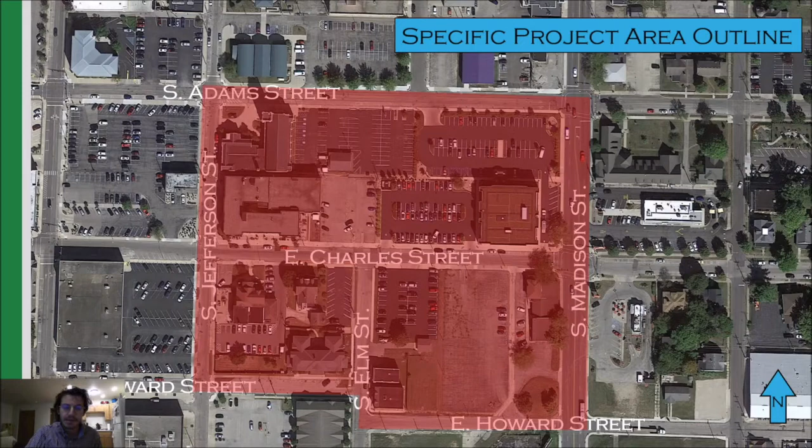Specifically, this is the area we're going to be examining. If you look close, in the area itself you see it's primarily parking lots, definitely land that is underutilized, and definitely land that could significantly increase its green capacity.

Speaking to that, here is the current land use plan that is in place now. You can see that by and large the area is gray with very little red and very little orange, which you can see on the side is coded for different uses.

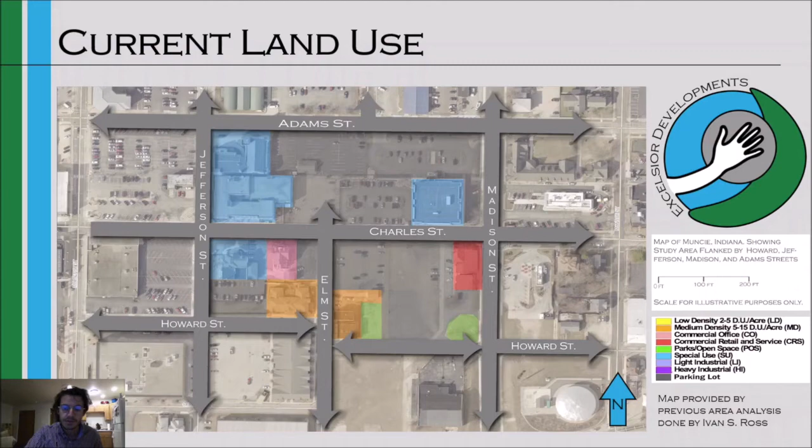Specifically, this project is located in the East Central neighborhood, which is probably most notable because of the historic districts it encapsulates. The project we will be examining is located right adjacent to the Emily Kimbrough Historic District, but the area itself does not have the same historic identity.

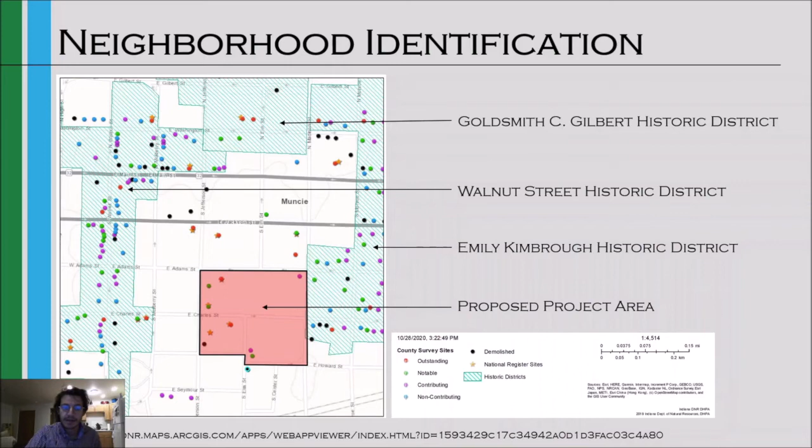So when tackling this project, we want to give it a new identity, and we're going to tackle that through creating a more sustainable community. From that, we will go right into the project renderings.

This is the total project rendering, and we'll break it down piece by piece so it's a little easier to digest. First we'll start off with the lower left-hand corner, as you can see.

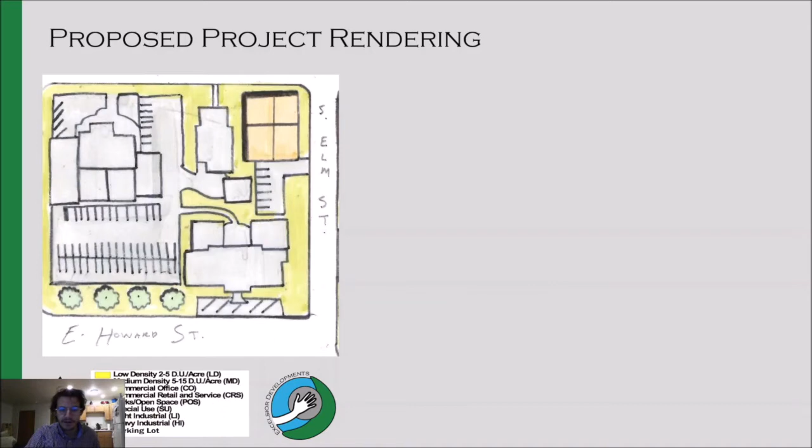This area is already pretty much developed. There's not a lot of space, but even with that, there are things we would propose to change.

The first would be introducing a 2-floor apartment complex, generating 8 new units of 7,200 square feet. We'll also rework parking and make the lot more shared, which will provide more opportunities for green space.

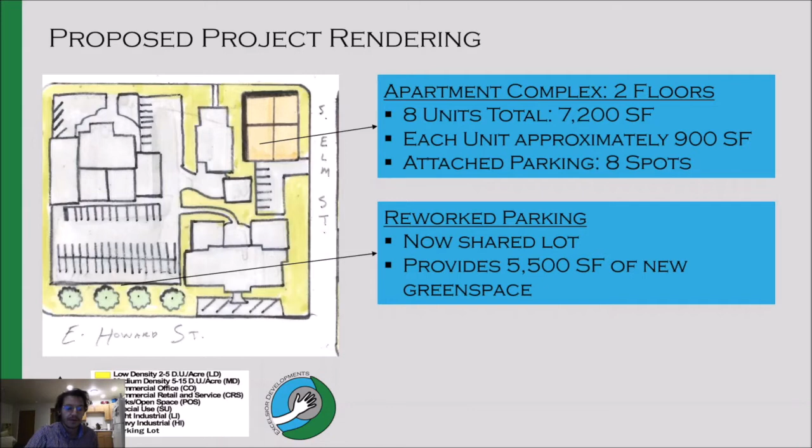From there, we'll talk about the next section, the lower right-hand corner. This project area has a lot of potential. First, we see the opportunity to put in a new apartment complex of 16 units, each around 600 square feet, perfect for a student.

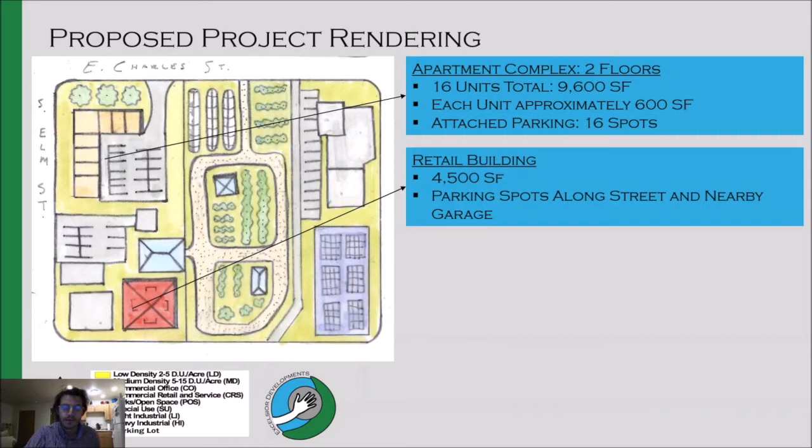We also propose putting in a retail building. This is shown as just one big retail building, but that could be further broken up depending on what the community needs. We see this as a great spot for a grocery store.

Then the next thing, maybe the anchor of our proposal, is a just-under-an-acre urban farm. This farm will incorporate animal husbandry as well as food production, really providing the cornerstone of sustainability and localized food production. It's an exercise of tactical agrarianism that we are really excited about.

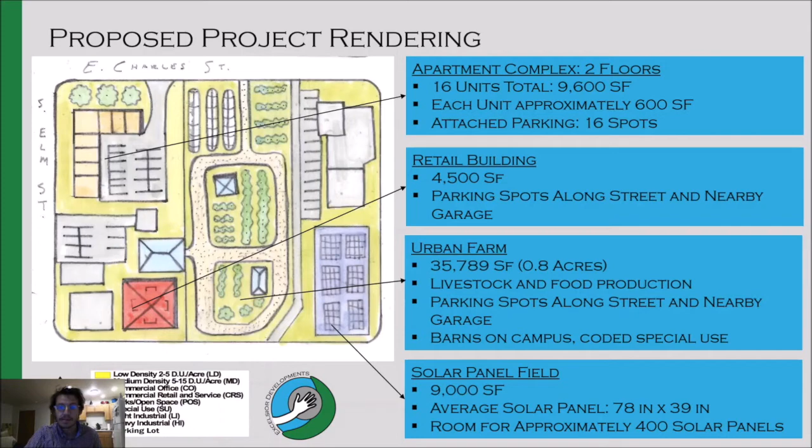We also propose putting in a solar panel field. We estimate you could fit about 400 solar panels within this field, and ideally this would serve as a model that the city can incorporate throughout its entirety.

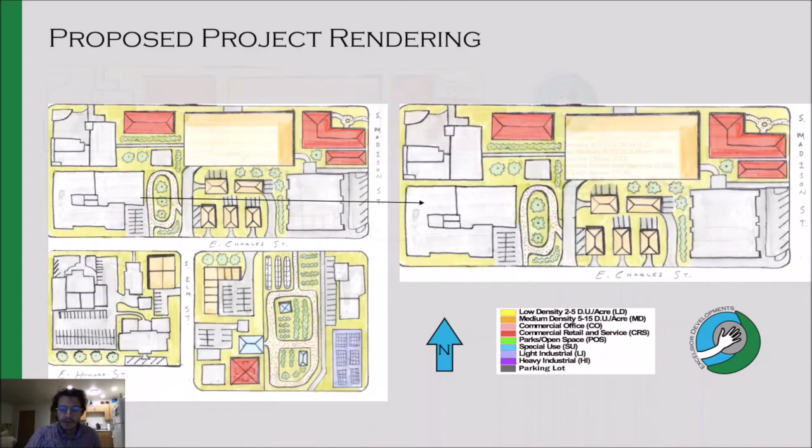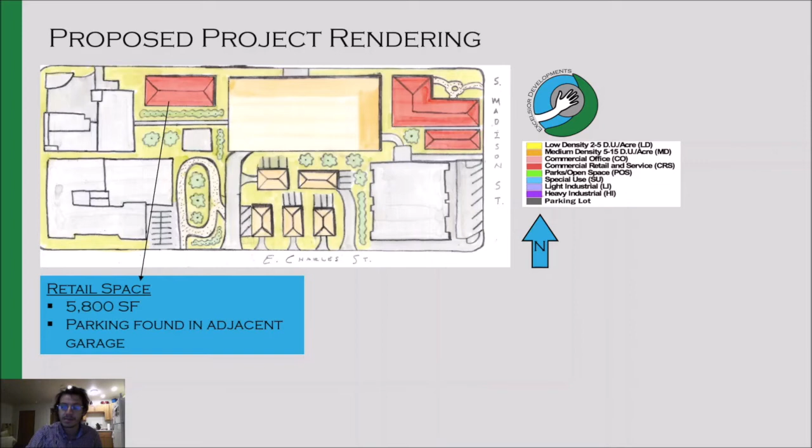Now we'll transition to the last section we'll be talking about today. This project area has a lot of opportunities as well. The first thing we'll speak to is retail space. Once again, this retail space could be one larger business or broken up into smaller businesses or restaurants, whatever the community decides is necessary and wanted.

Then we also propose a park. With the way we are reworking parking, we will have more space for green areas and more space for leisure, a space to actually enjoy instead of just staring at concrete all day.

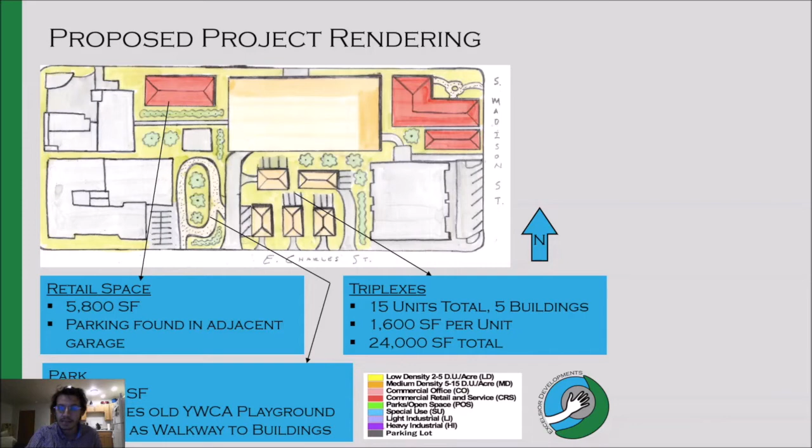Next, we propose putting in triplexes. These would be 15 units in total of about 1,600 square feet, so it would be a great place to raise a family and provide some of the missing middle housing that is currently not present in the area.

Finally, next we'll put in a shared parking garage. This will be around 31,000 square feet, so it's quite substantial, but it will generate 516 new parking spots, which will generate a lot of revenue that we'll see later. We also propose 2 more retail buildings.

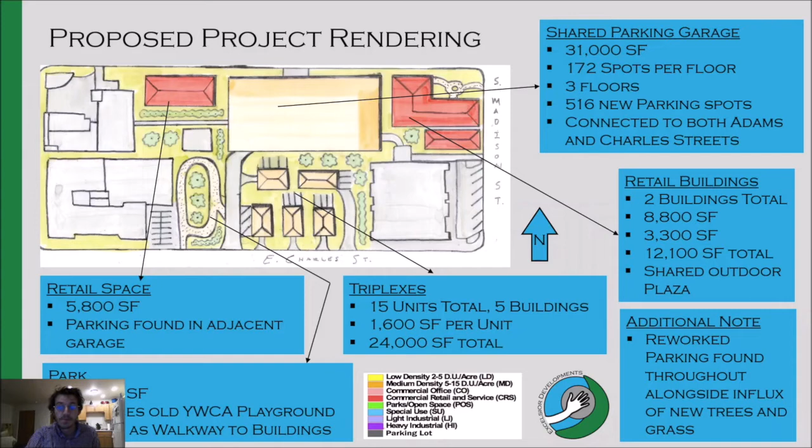Now these are coded retail, but if office space is more needed in the area, it could definitely change. It's important, we found, to incorporate a shared outdoor plaza, as features like that become more of a necessity in a COVID entrenched world. Also, the reworking of parking has allowed us to put in more trees and more grass, things that have been previously absent in the area.

Concluding, here are some closing remarks from us here at Excelsior Developments. We see this area as having huge potential for underutilized land, and through utilizing it more efficiently, you can give the area identity, creating a more diverse community while giving new places to live, work, play, and congregate, ultimately all in the same area, which is sustainable.

This also provides massive opportunities for revenue generation where there wasn't any before. This is also an effort that can help piece Muncie together. If you think of the city as a mosaic, this is a tile that other areas can build upon, ultimately creating a more beautiful and sustainable city.

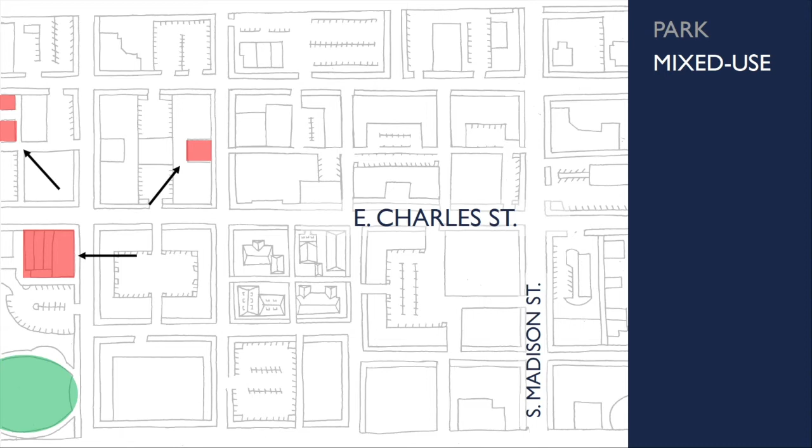First, we'll mention the park that's nearby, a great recreation opportunity with a lot of public programming that happens there. Mixed-use retail activity, notably the cluster on the left side of the screen on Charles Street, has a neighborhood bar there that's really popular. Also notable is the vacated alley that serves as a community space.

We have offices surrounding the site. Most of these are not historic structures; the one that is historic we will note, and that is the Riley Jones house on Charles Street. There's a YMCA, a YWCA providing important program and support for women, and transitional housing operated by the county. Open Door is a facility that provides affordable dental and medical services. We do have some affordable housing with the Howard Square development.

Several churches on the site, the public library, and municipal use there in the bottom corner with the water treatment facility. And across Madison, we have several fast food locations. It's important to look at the existing land use because we want to integrate our development into this site and keep it within the existing context, but also add some additional vibrancy.

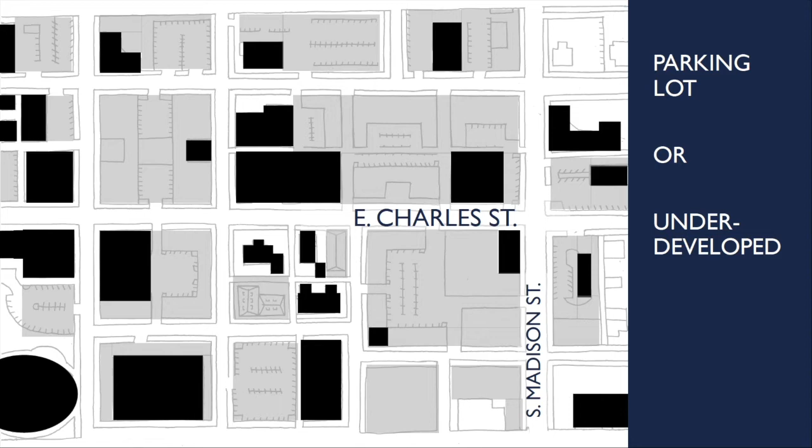So I took those buildings and blacked them out to demonstrate that this is all the parking that's on the site. It's about 75% of the land area, either a parking lot or some sort of vacant or underdeveloped lot. This is our focus area: 5 blocks, or 14 acres.

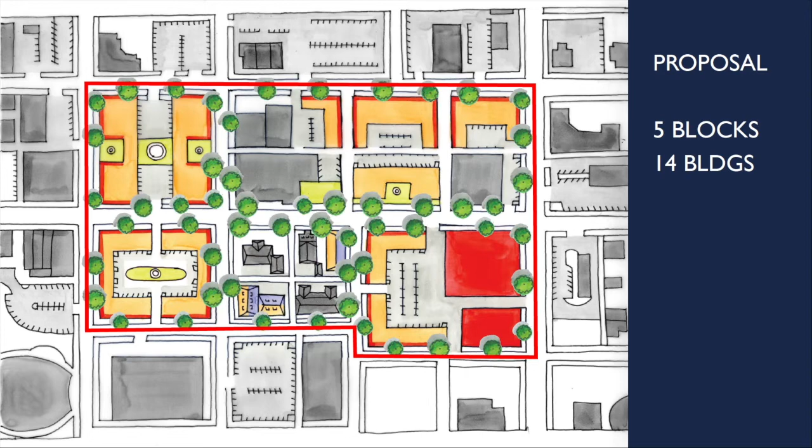So now we'll look at our proposal for the redevelopment of this site with infill development, again talking about use. This is what we're here to do: 5 blocks, 14 buildings. You'll see that we have a really wonderful illustrator on staff. We actually have to take down 4 buildings in order to make this development happen as proposed.

We intend to bring housing to the site. We want to respect the existing social services. We want to attract a grocery and a pharmacy, opportunities for retail and restaurant. We want to improve the connectivity, and we want to provide some on-site energy sources.

So looking at each one of these blocks individually now—there's 5 of them in total—a lot of mixed use proposals. We're keeping most of our development at 3 stories. We feel like that's a very good pedestrian scale height and that it's conducive to the existing character of downtown Muncie.

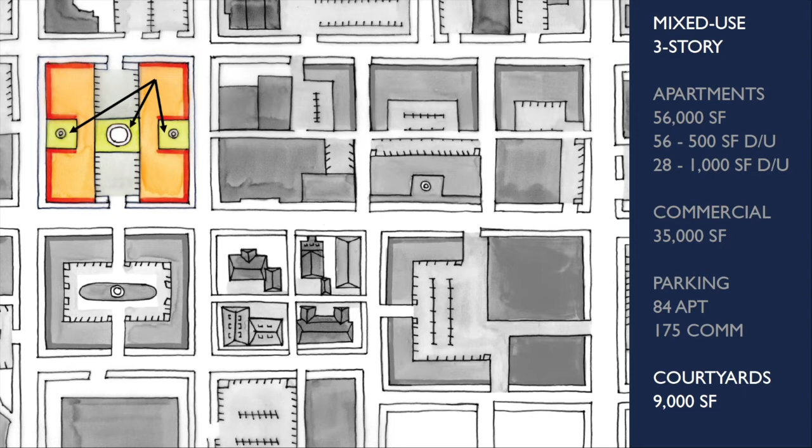Also, part of what makes our organization unique is how we like to add something kind of magical to a place, and we're doing that in this development through the use of courtyards.

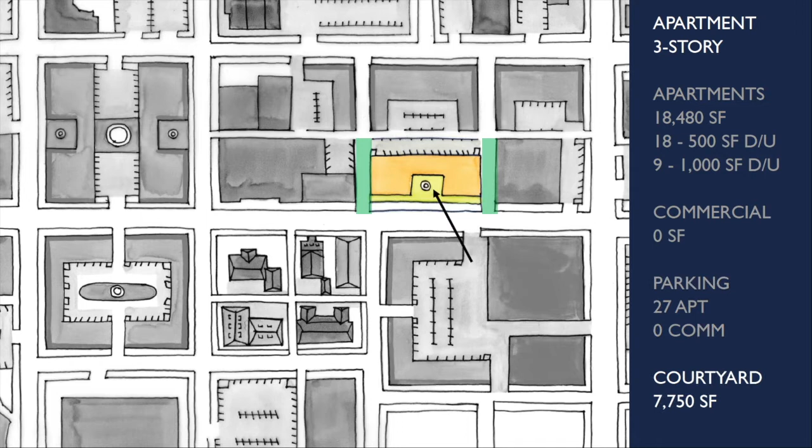This is just an apartment building. We thought with the adjacent social services, it might be nice to have a respite from some commercial activity, so this is just an apartment. Again, it has parking on the inside of the alley, a courtyard, and green alleys.

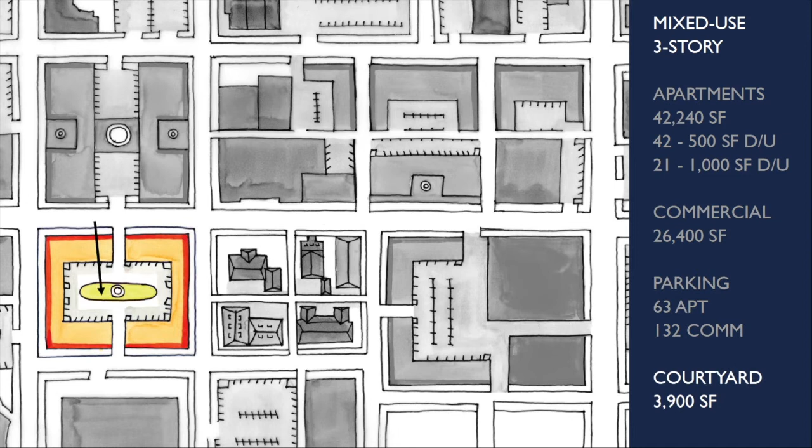Moving along, mixed use, another 3-story building—apartments, retail on the first floor, parking in the back, courtyard in the center, with a different configuration to add some interest.

This block already has some existing structures on it. This is where the transitional housing exists, and so we are going to supplement that with some additional missing middle infill housing, providing more affordable and transitional housing.

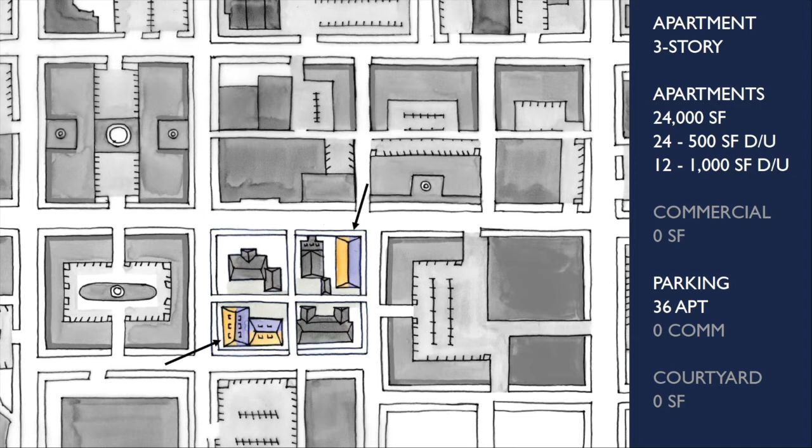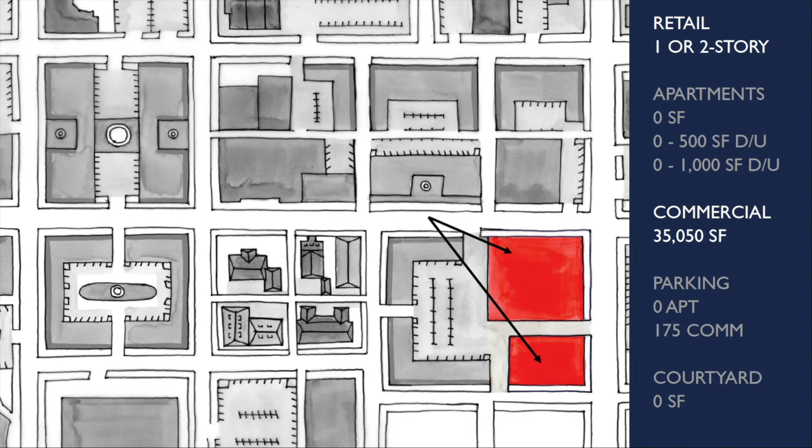Now we're going to talk about the proposal in terms of the unique character we intend to bring to it. Here is where it's a little easier to see where we restore the alleys. We're restoring all the alleys and the connectivity they provide for parking, utilities, and deliveries for businesses, all outlined in purple.

The green alleys are there in green, street trees everywhere producing a canopy, courtyards identified with the blue shaded area, and fountains with the blue stars.

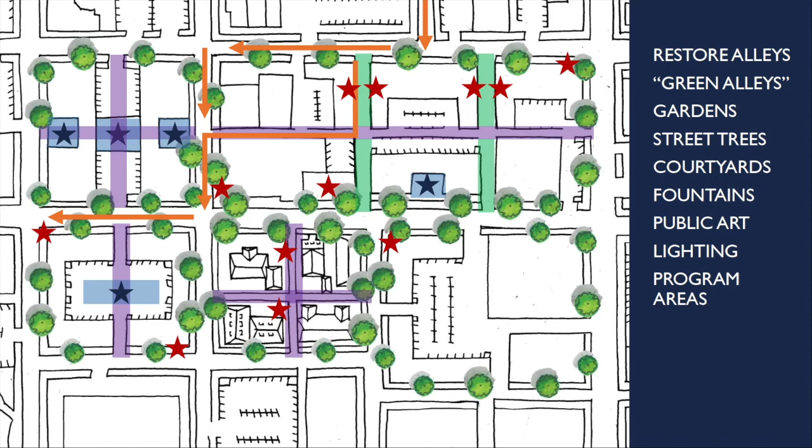Public art - we're adjacent to the Muncie Art and Cultural Trail, so we want to pay homage to that and also create some identity for downtown by installing murals and sculptures. We're going to recommend some unique lighting, and these different courtyards and green alleys provide some unique program areas.

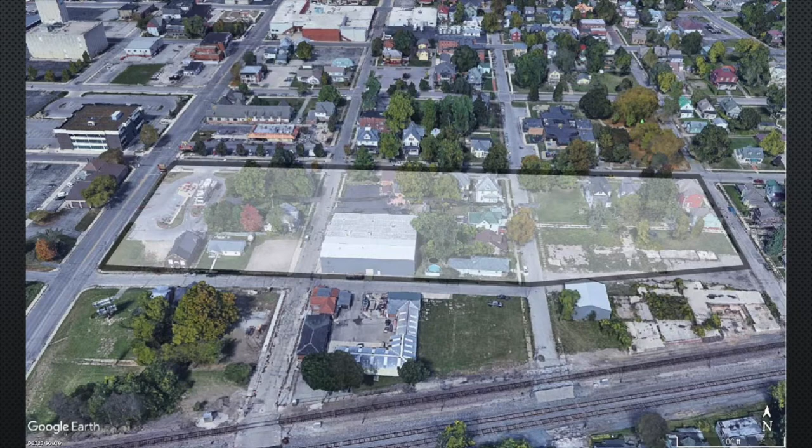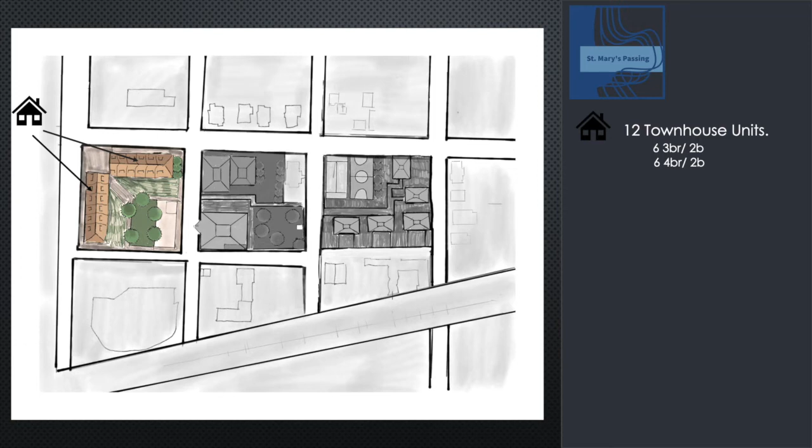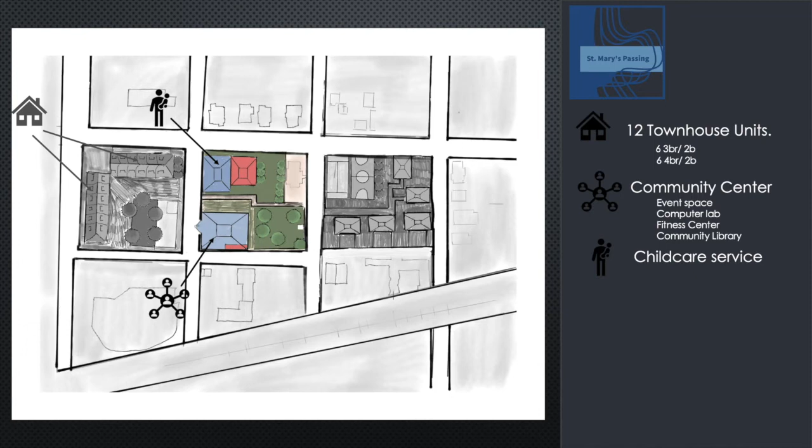In the middle block, we have a community center that has an event space, a computer lab, a fitness center, and a community library. We have a daycare facility for our residents as well as community members in the surrounding area. We have a community co-op, which is a community-owned market, as well as brick and mortar spaces for those who are looking to enter the entrepreneurial business but don't have the access to get a bank loan to get access to that foot traffic. So they could rent out some of the property spaces or shelf spaces in the community co-op to further their business.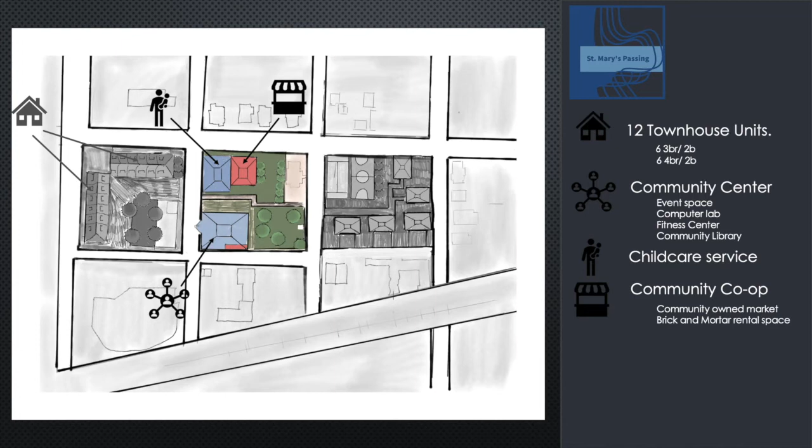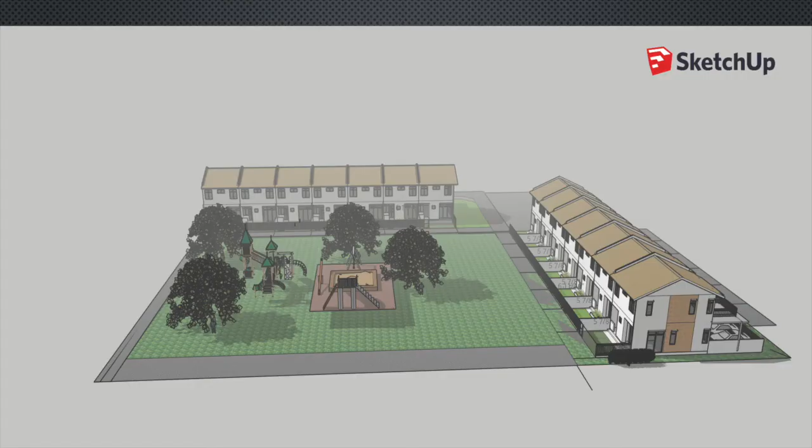On the further end, we also have a community garden and a park. On the further end of our property, we have 2 duplexes, 3 fourplexes with a basketball court and a tennis court. Next, you'll see some SketchUp models of what this would look like.

Our site strategy looks at this model right here. We take a family who is housing insecure or lacks housing, and we provide housing for them. That answers only one question. Next thing we do is we provide childcare. It's proven that childcare at this rate costs about $30,000 a year, so we give a family access to free childcare. This allows the parents to pick up more hours at work, or apply for another job that may have hours that would have conflicted with the lifestyle they had before they gained housing with us.

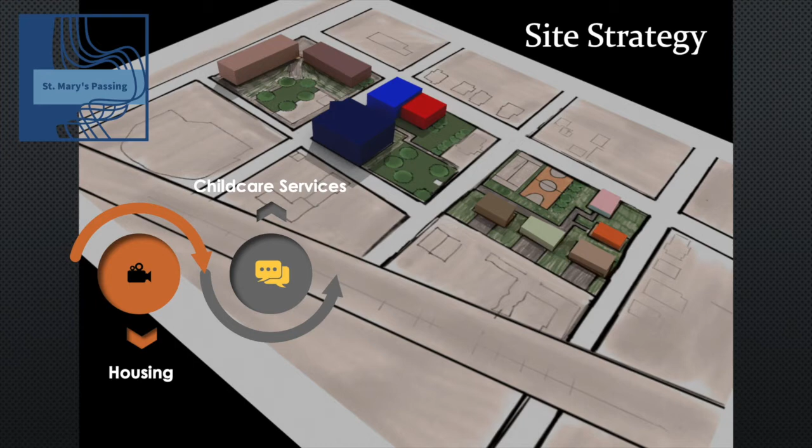Through our event space, we hold programs that encourage financial literacy, and this allows people to understand how to manage their money better. We actively believe in community engagement through our community park and our community co-op. This allows people to feel like they're not in this alone. The community aspect is very important to us.

As you see in our layout, it may be like 3 blocks, but there's essentially one long path where you can see to either end of block 1 or block 3. Finally, when all this is done, we will see a steady increase in their social, physical, and mental health. We believe that following these steps, the family that enters will not be the same family that leaves our site.

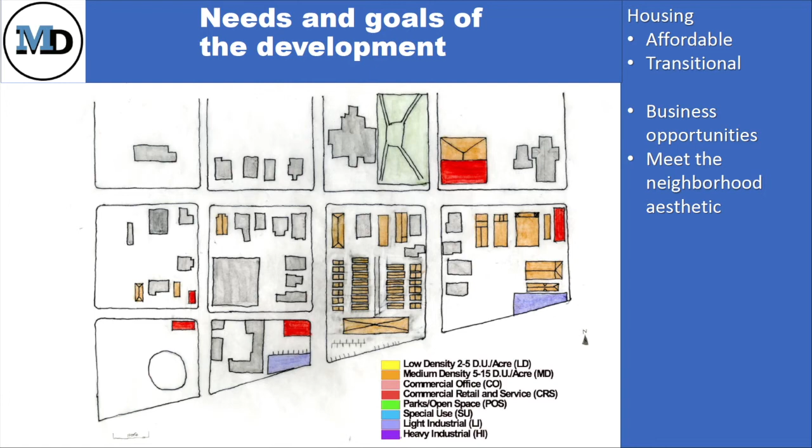So the goals of this development are working on affordable as well as transitional housing. Because of a lot of the services in the area, there's a lot of people in need of missing middle housing. I also am attempting to provide business opportunities for individuals in the community as well as the neighborhood who are attempting to work on transitioning into the next part of their lives, as well as keeping with the neighborhood aesthetics.

So the local amenities are the YWCA, the soup kitchen, the child care center, which is right here near Washington Park, the women's shelter, as well as open door health services.

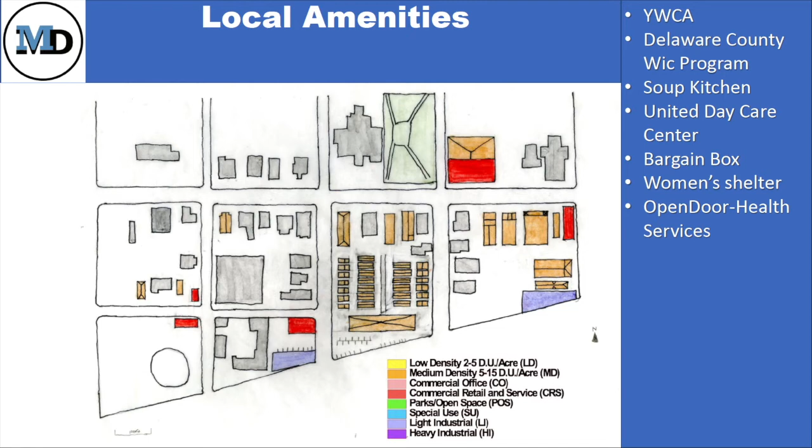So the first is this single-family home. It's roughly about 1,000 square feet. A lot of the homes that you will see here that are single-family are going to be typically smaller, just because our goal at Missing Middle Development is not building buildings that this is their final stage, that in fact, as the neighborhood continues to grow and develop, the homes themselves can also continue to be added on. So in this case, this home could go from a 1-story to a 2-story, or maybe it can be added on to the back as the family or whoever lives in the home itself continues to grow.

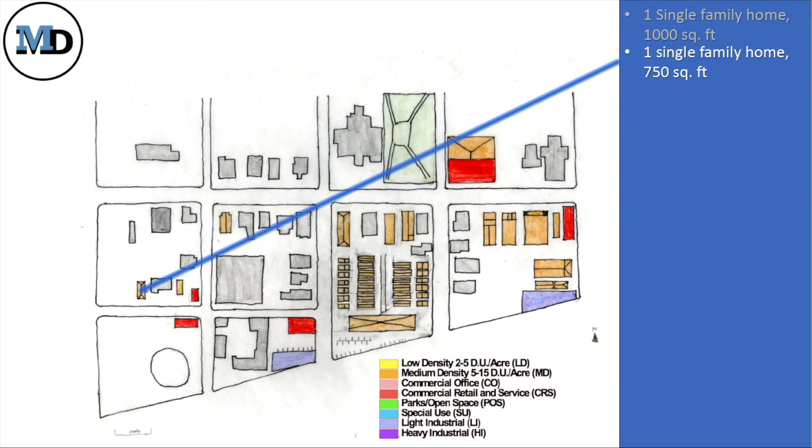So the next one is about a 750 square foot home, which is a little bit smaller, but there is the expectation of growth as well.

So our first commercial building is about a 900 square foot building. It was actually based off of a building more towards the river in the East Central neighborhood, which would be able to provide someone who is just starting out some type of business idea, just to see if there's the chance of continued growth.

So the next one is here on the corner, which is more of like a corner store. So it would probably be a 2-story brick building itself. So it would provide about 2 tenants.

The next one is a slightly smaller one, 500 square feet. Just because of the size of the lot, I thought this would be a very suitable building for the site. The next one is a little bit bigger.

The hopes would probably be with this one is maybe a small grocery store. Nothing too extensive, but something to start to bring food options in to the area.

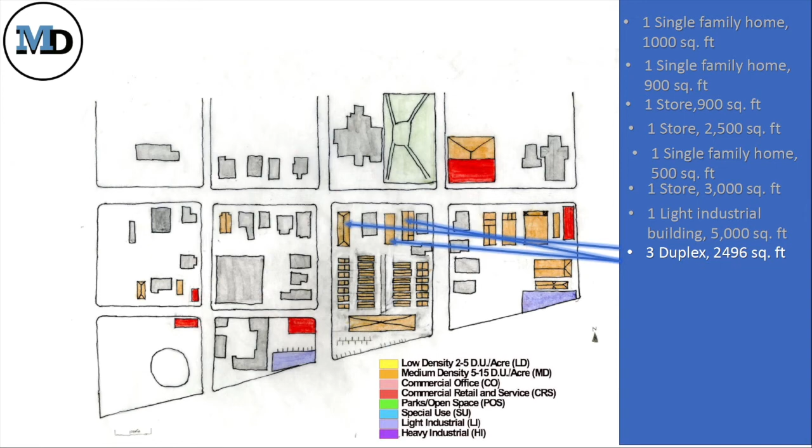So here we start to then get into the cottage court. So they're roughly about 900 square feet. There's 13 of them, and there's a kind of a main corridor that connects off of the alleyway with the parking, which we will eventually come to later.

And then I also, on that site, I then put 15 ADUs in with the parking beneath the ADUs themselves. So they're actually raised up, so then you can put the car in, because a lot of the parking in the area will be on street parking, because I wanted to make sure to utilize as much of the space as possible to provide missing housing for the residents of the area.

I'm sorry to interrupt. You're gonna have to make your commentary on each development type a little bit briefer, because you're already almost at 8 minutes.

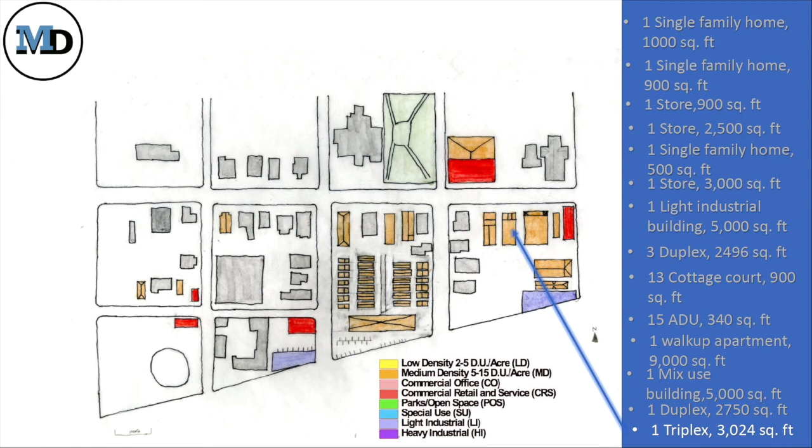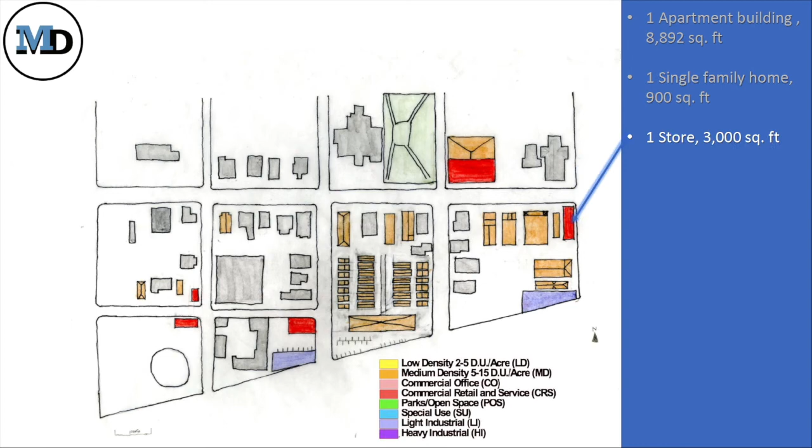I put a duplex here, I put a triplex, I put an apartment building, which is about 9 units itself, another single family home, another store, here's a duplex, here's a single family, another light industrial.

So the phases, everything is incremental, roughly between a 5 to 10 year period. I wanted to make sure that the growth was slow enough to allow the community to be able to work with the development, so everything isn't completed at the same time, but there was a slow growth over time.

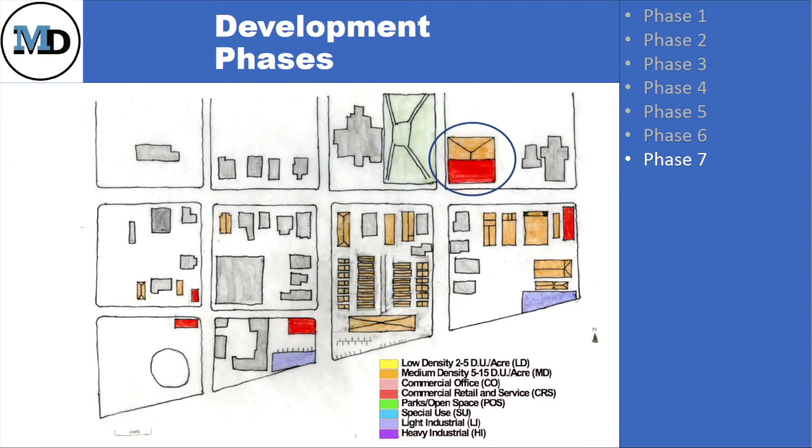The development here will then be near where the railroad currently is. Then I start to move back onto Charles Street, then I start with the cottage court, then I start again going back with East Charles Street, which is then followed by going back to the railroad along Hackley, and then the final one is the mixed-use building.

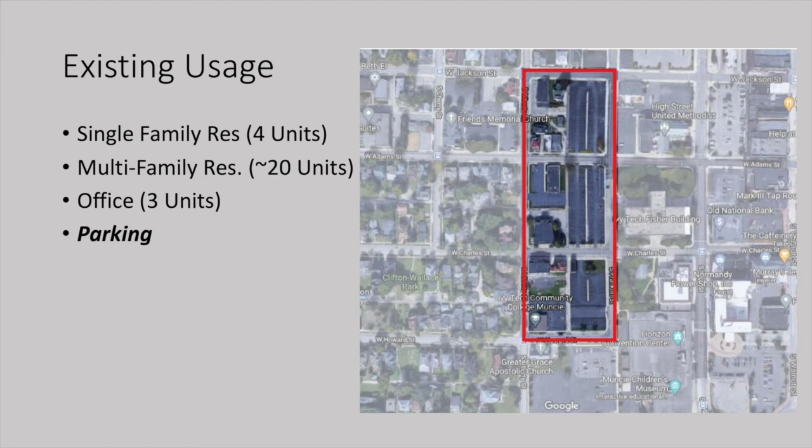So the existing usage of this site, outlined there, is currently 4 units of single-family residential, a few apartments in that area. Some of it is affordable housing, and a few office spaces as well. About 3 businesses are taking up real estate there, but as you can see pretty clearly in the image, it's pretty much mostly parking. All of that strip of parking on the right side of the image belongs to Ivy Tech, and on the left side there's a few buildings, but it's still interspersed with parking, so it's honestly very close to about 75% parking.

And the existing streetscape. This is a streetscape plan of West Charles Street, which is near the bottom of this site. It's very much scrubby ornamental trees, overly wide street, just kind of harsh and barren. Even the trees that are there, they're just kind of scrubby and they're not really serving any purpose. They don't provide any significant amount of shade. They're just sort of hanging out.

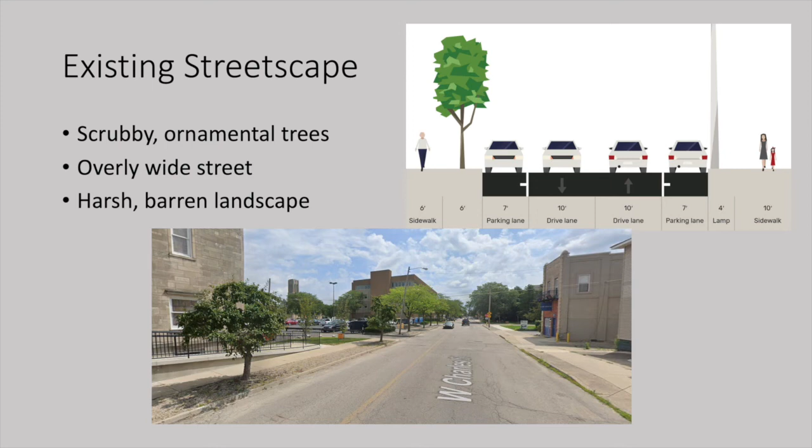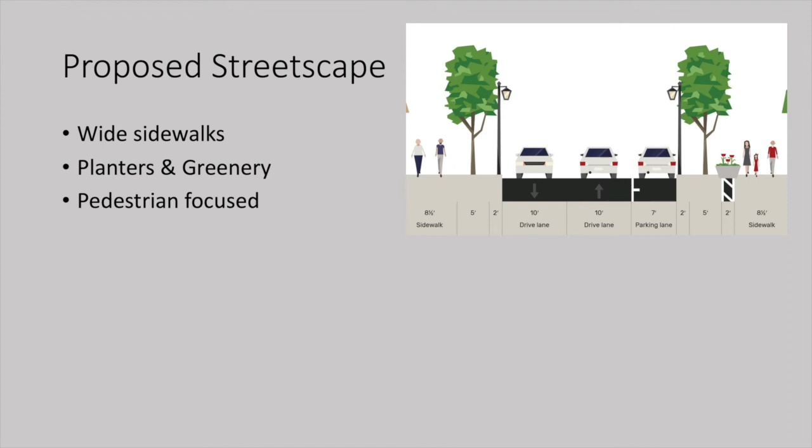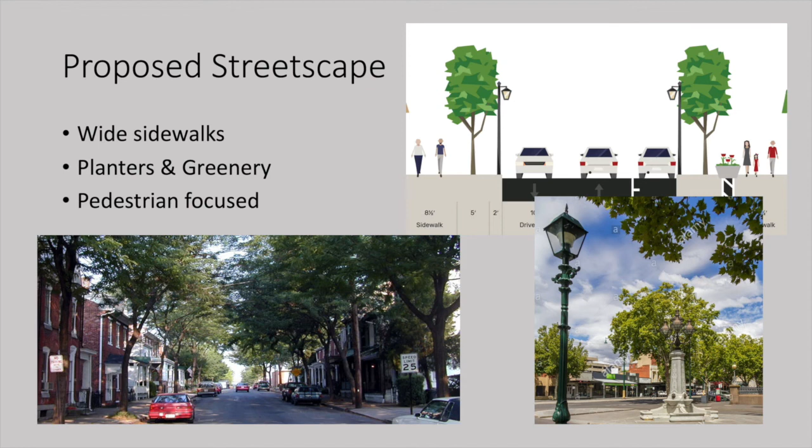So the proposed streetscape then doesn't look much different in this picture on the right. But we want to have some more trees, some more significant trees, higher, providing some shade and some greenery, as well as making some ornamental streetlights, narrowing up the road a little bit, and using some of that reclaimed space for planters and things like that to make it more green. This is an example of what that might look like. Again, taller trees, greener canopy cover, and some streetlight sort of things to dress it up a little bit, make it a more interesting place to be and walk around.

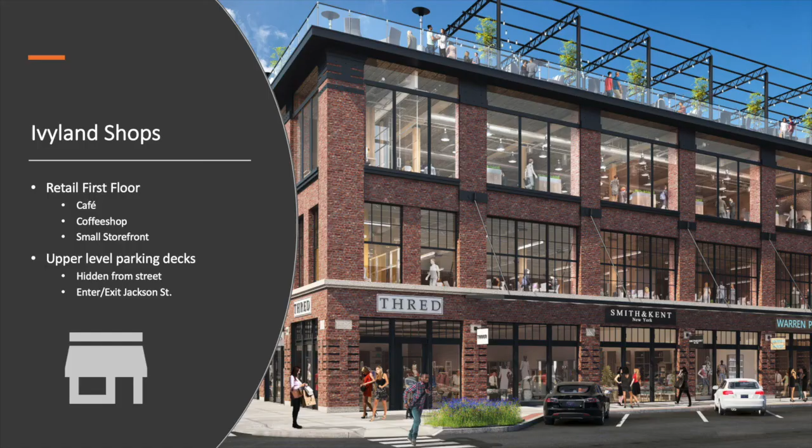So first, Ivyland Shops. It's retail on the first floor. There's 4 spaces there for cafes, coffee shops, sort of small boutiques or storefronts. You could even have it being across from Ivy Tech, you could have like an Ivy Tech store in there, or even a little bit of classroom space if that was needed right in the vicinity. And then the upper 2 levels are both parking decks. You would enter and exit off of those on the north side there on Jackson Street, which is one way, so cars are already going fast. It's not really a good opportunity to have any kind of significant storefront space, but it is good for cars entering and leaving. So that would be the main entrance and exit to the parking there.

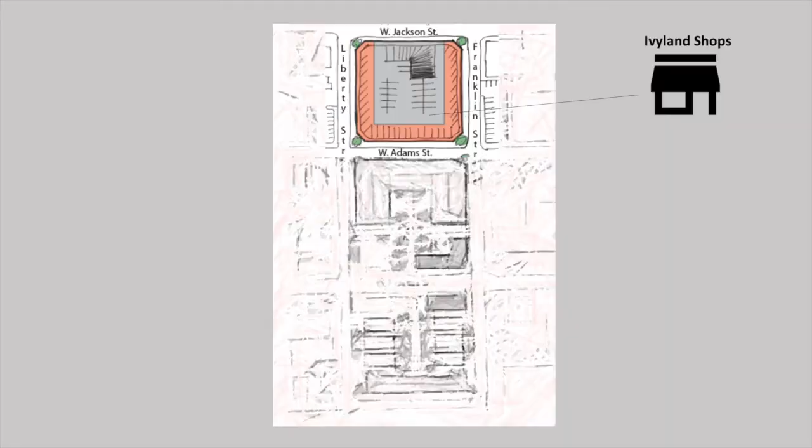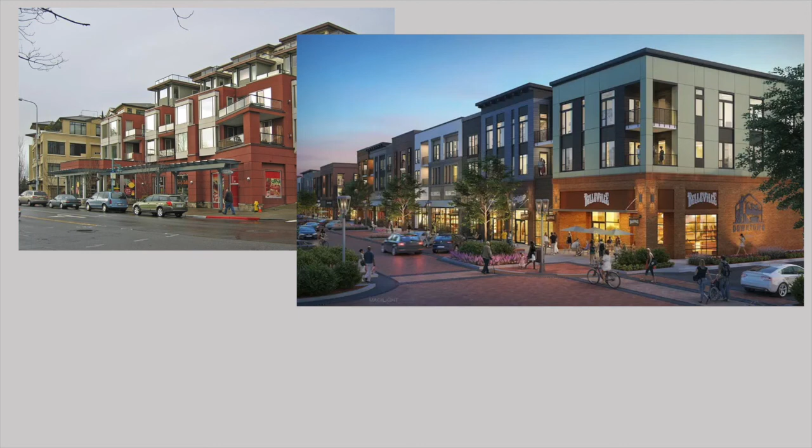So these are some examples of just some sort of aesthetic things that this might look like. You can see that obviously this is apartments on the top upper floors. I couldn't find an exact example of what I was looking for, but it gives you sort of an idea of the retail on the bottom, and still some utilization of street parking there. Some trees, some greenery, dresses up the space, makes it again a nice place to walk around, while still being functional up above.

Next stage of the development, Ivy Park Apartments. Studio and 1-bedroom apartments fitting for Ivy Tech students, faculty, and young professionals.

Located in the heart of downtown, near bars, restaurants, and downtown offices. As you can see on the site, about half of the apartments would look out at the rest of the city, and half would look in on a little courtyard space that's semi-private, with some gardens, greenery, and trees—something totally missing in the current usage.

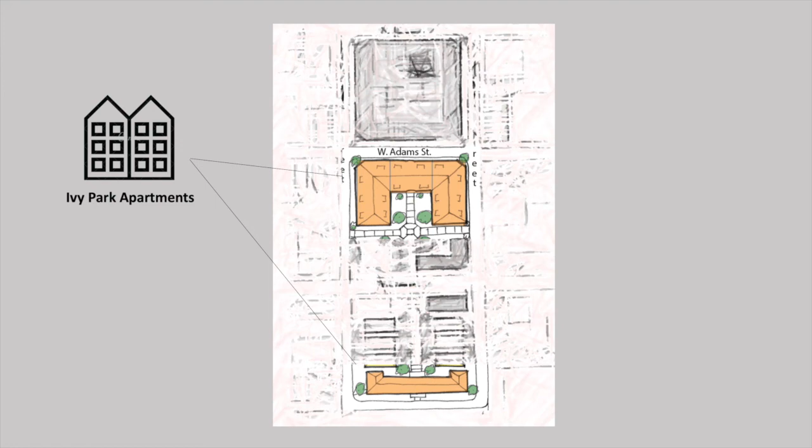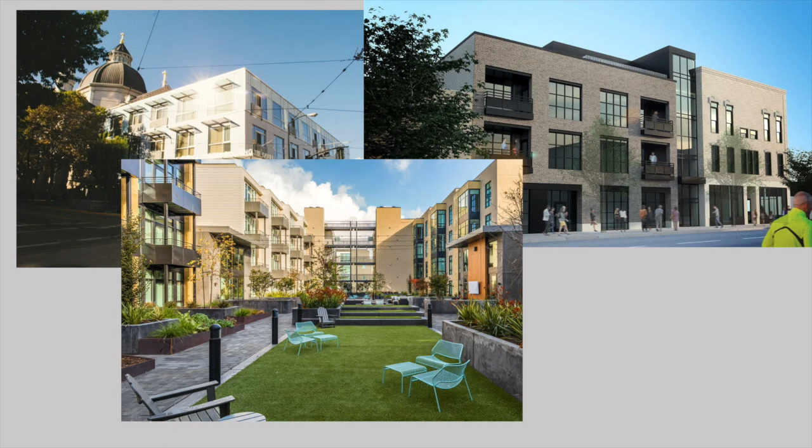So this is, again, some examples of what that might look like. Just some different spaces. As you can see here, there's this nice greenery area. It's semi-private—you're only sharing it with your neighbors—but it's secluded from street noise and sort of becomes a little oasis in the middle of the city.

Profit and loss: about 36 units of apartments, averaging about 800 square feet each. $28,000 a month in revenue, $335,000 a year. Expenses estimated about $3.6 million to build.

Next, moving down the block, Ivygrow offices. We wanted to incorporate some retail and office space a little further down, fronting Charles Street, which was sort of a historic corridor in this area. Much of the original architecture and buildings there have been destroyed, so the idea would be to restore some of that.

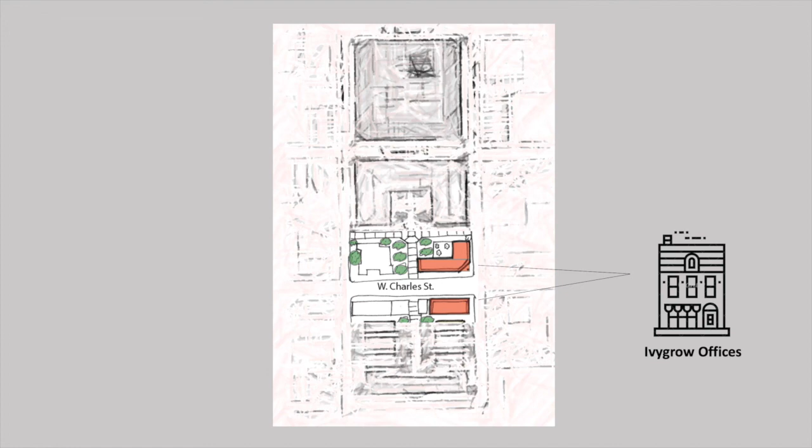So this is fronting Charles Street. There are a couple of existing buildings there, including an old church now used for apartments, and this would be sort of infill on the other sides.

Finally, Ivy Park Bungalows. This gets at a missing middle housing arrangement, many of which are either no longer built or have been removed from urban spaces.

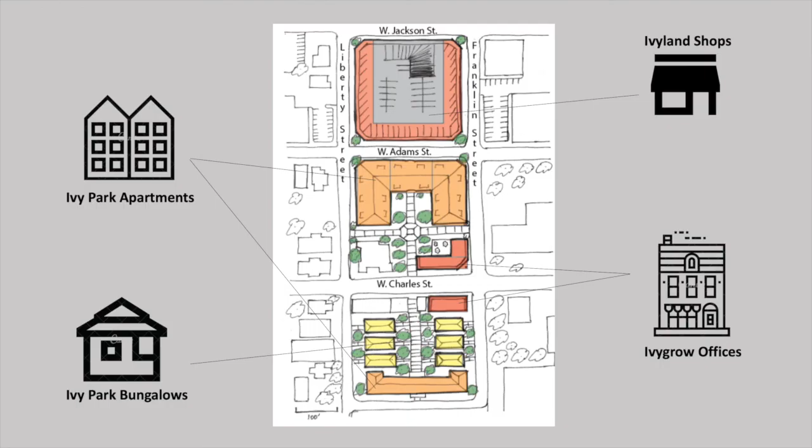Profit and loss for the bungalows: 6 one-and-a-half floor units, about $12,500 in revenue per month, $151,000 a year. Cost of construction estimated about $1.6 million.

Parking considerations—of course, can't do anything in downtown Indiana without that. Currently, with this arrangement there would be 342 parking spaces lost. Still, 51 street spaces exist and are currently underutilized, needing one space per unit for 62 units, as well as the 200 spaces lost from Ivy Tech.

With the parking garage added back, there would be 368 parking spaces added, as well as the 51 on the street that are currently underutilized. So the parking would be pretty close to what it is now, just rearranged in a different format to make the space more usable for people rather than for cars.

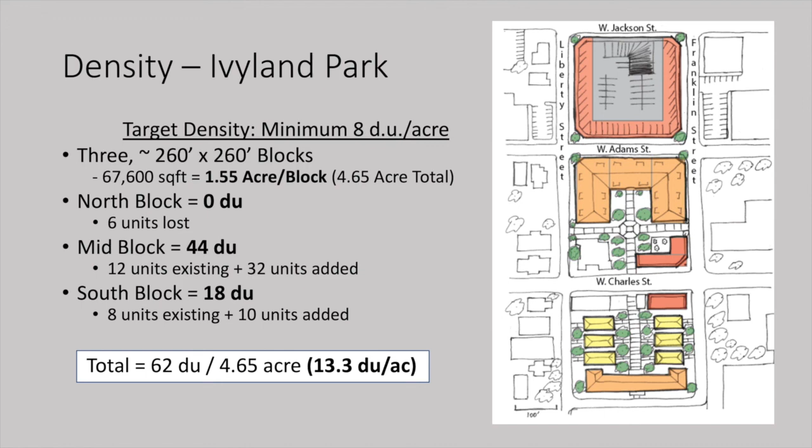Density considerations: the target density here would be a minimum of about 8 dwelling units per acre. Totaling up, we come out to just over 13 dwelling units per acre across the combination of these developments.